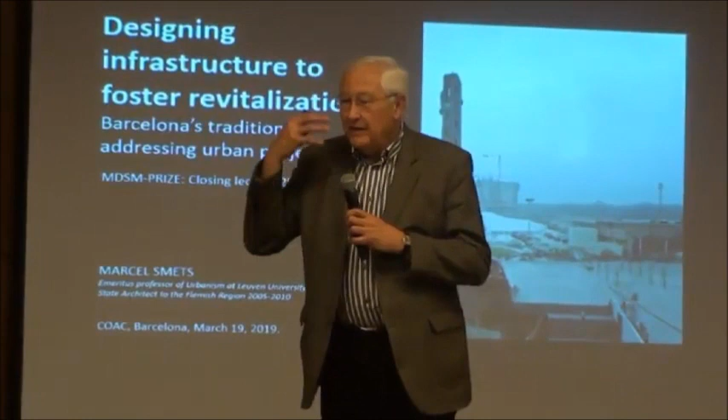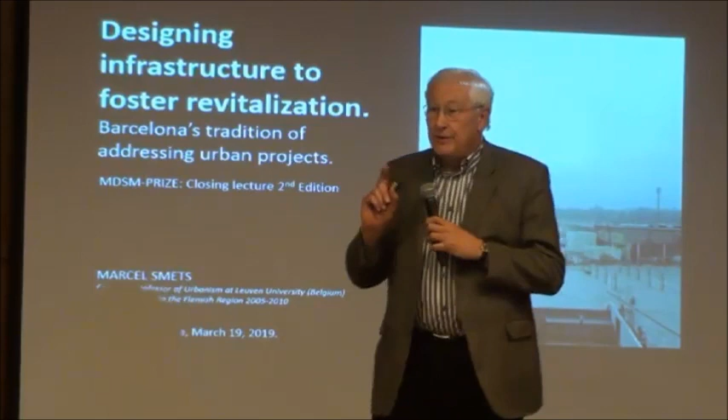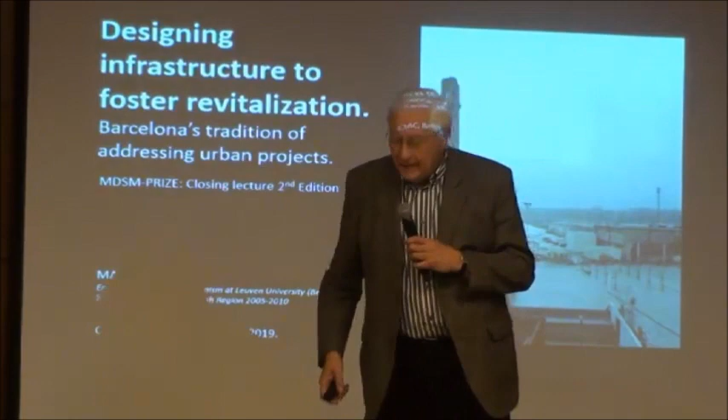Thank you very much, Joan. This is a place where I understand Catalan, especially when you talk about me. And I would like to add that maybe, and it's one of the nice things that you remember, that you highlight in this introduction, and I would like to return the ball, you know. I think we belong to a generation that has never considered urbanism just as design, but also as an intellectual trajectory of history, and also, as you did with the Olympics, influencing the decision-making, trying to do well for society. I think this is a very important element of what I'm going to talk about later, but it's a very generational thing also. So thank you very much for highlighting that. Thank you very much for being here.

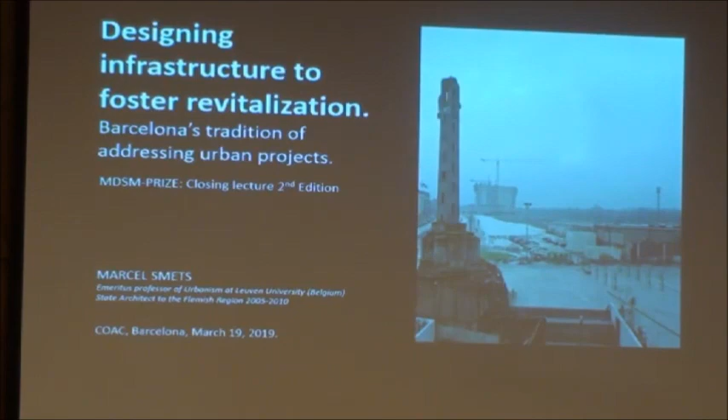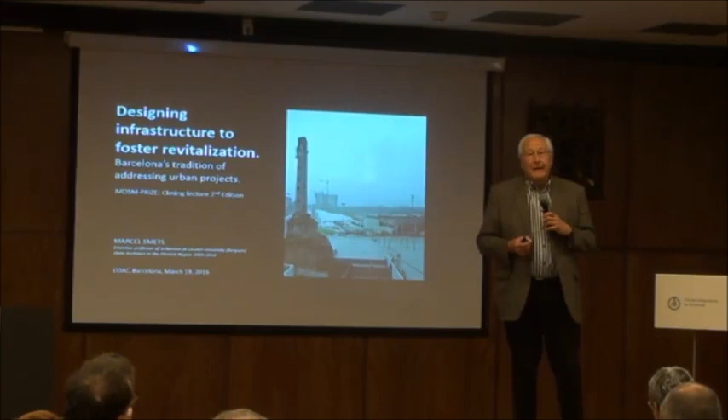I feel very honored to speak in this room or in this building, because as Joan has pointed out, Barcelona has always been extremely on my mind, as the song says, and I have many friends and masters here to whom I pay tribute, because many of my thoughts are also part of them.

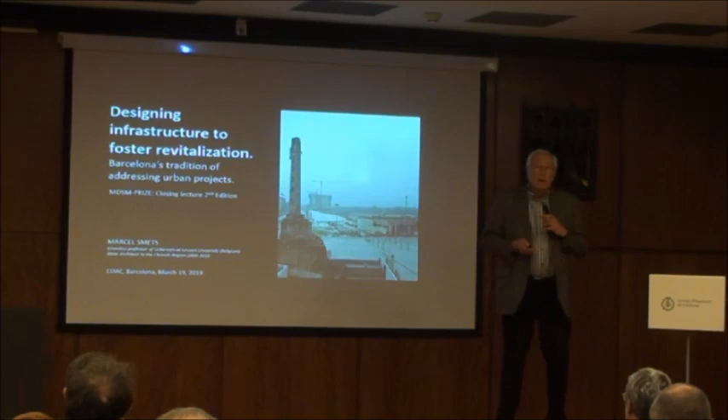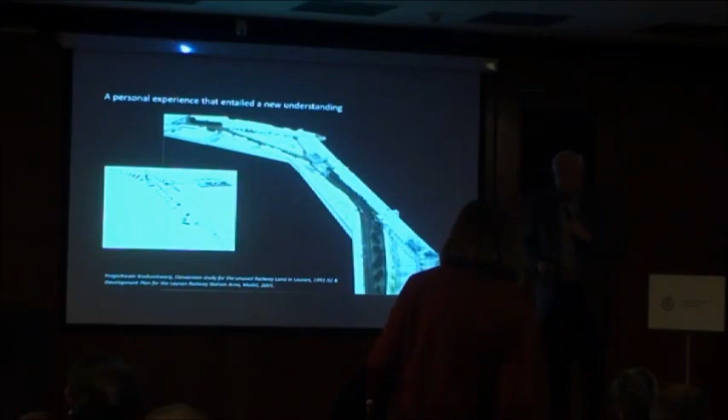So I started this picture, and also the poster that you saw, with this picture of the Leuven project in the beginning, in the early phases. The phases of what Ignasi de Solà-Morales would call the terrain vague, the moment when nothing yet is settled and everything is only hope. For me this is also important, because this is maybe the moment that is, for a project, one of the most interesting.

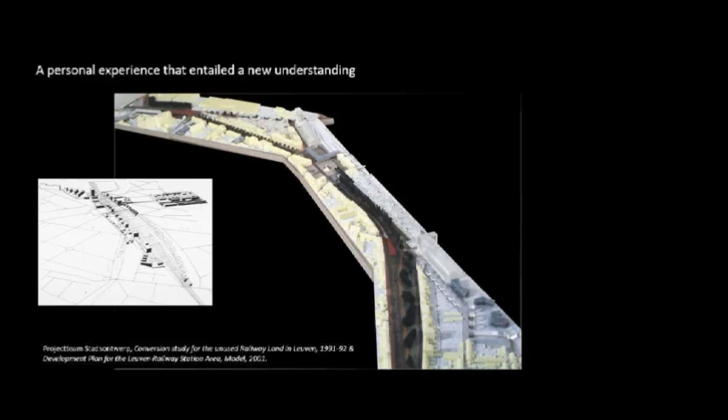Many of you know that I had the honor of being entrusted, when I was teaching at the University of Leuven, by the city, with the reconversion plan of a large area involving the station, but much more than the station. This plan involved a study in the first phase, and then a more detailed commission later. The reason I bring it up is because I'd like to start my argument by explaining where it comes from. It comes basically from a personal experience, one I had also with Joan, when I remember we talked about this project in a very early phase when you came to teach at our university, and later with Manuel.

What I want to illustrate is very practical. The thing was on a large scale and a medium scale, and then on a very detailed scale, involving the passage under the tracks, and also the place where the bus station was going to find a sort of new hall to the city, a new entry.

But at the same time, we never really solved certain issues. Actually, as you see, this idea of the square in front of the station is too divided. And there are other things that I could mention.

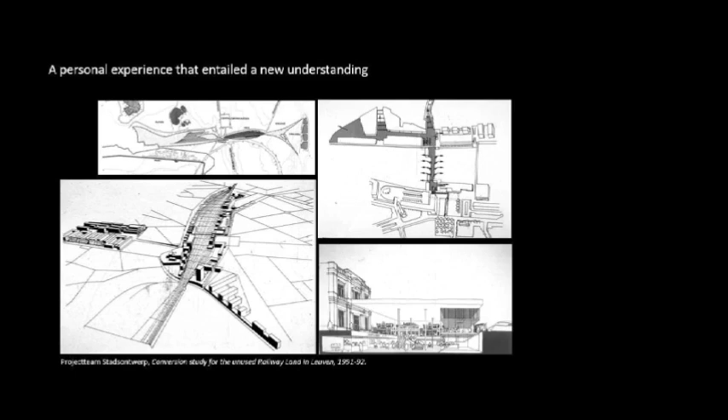So when the new mayor came to office and we were managing the whole operation, I had, I think, one of the best ideas I've ever had in my life: to involve Manuel in this adventure. I had known Manuel from the Antwerp studies, where I was his outside critic. And actually, what happened was that Manuel was able to solve a number of issues that, in effect, we had never addressed.

I think this is where you recognize a certain mastership, when you know a project by heart and you find that there is an invention which is done which you hadn't thought about.

And the invention had to do with how you link the city while having to pass the major throughway, and how you make a parking accessible from all sides, both entry and exit, and make it a connection in rainy weather between the passage under the rails and the city. This simple idea, though it looks simple, of making the tunnel go to minus two, which allows the parking to be sort of a bridge above it, was really like what they say, the egg of Columbus.

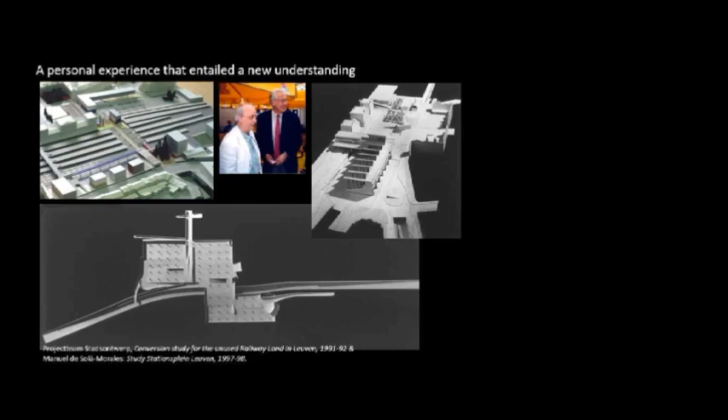I would like to start this lecture by illustrating just a few points out of this project of Leuven, a few points that I think merit commemorating because I recognized afterwards they are part of a larger story.

One element is that, which Manuel taught me, there is a layered situation, and you can exploit programmatic complexity in order to create a number of fascinating layers.

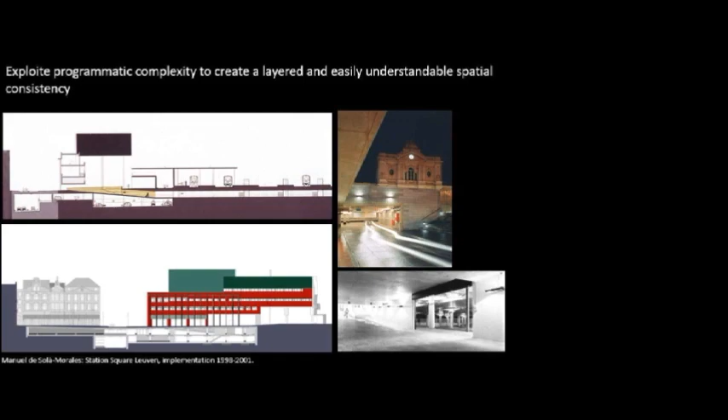For instance, the passage, and it's very often the section that becomes important. The entry into the city, which is at the same time part of the parking, the tunnel, which becomes part of the parking with the entry and exit, the bus station related to this entry, the fact that the bus station at the same time rests on the parking, and by doing that you need a certain grid, etc. All of these elements of the underneath and the upside, all being thought together in a sort of layered way.

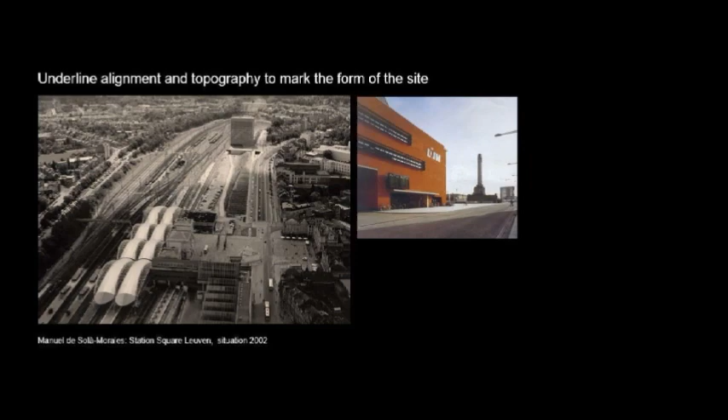The other point is the fact that the alignment and the topography really form the site. The idea of linearity, which made, for instance, the direction of the bus building, which we had initially planned, turn so that the direction of the site would be more unilateral.

Also the fact of creating a new building typology that accentuates the character of the site. Of course, when you make a building that closes a square that never existed before as such, and divides the public square into the buses here and the public square there, you have an angle.

I don't have to tell you how angles were important for Manuel de Solà-Morales, but this angle is also pronounced by this larger roof, while the opening in the building portrays the idea of the train that enters into the square.

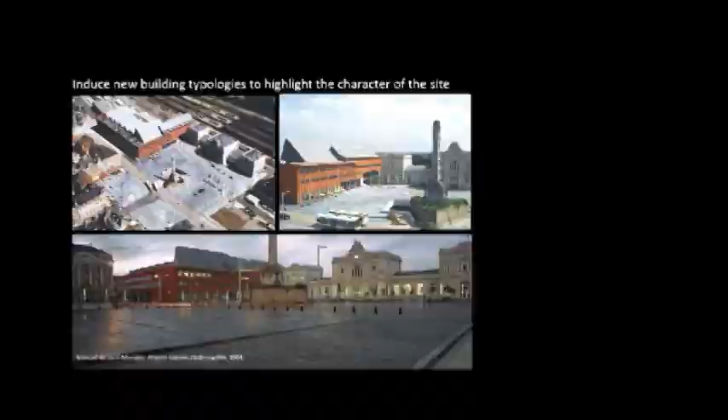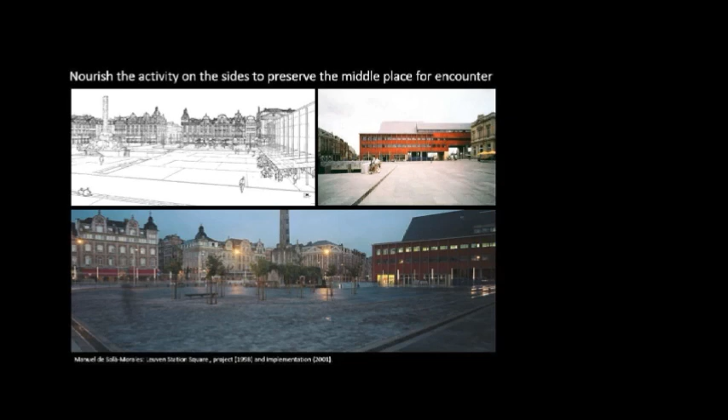The idea that the center should be empty in order to, by making uses and creating activities all around it, and by continuing the idea of the terraces, keep something of the terrain vague idea in the middle.

And then, of course, the idea that a tunnel or a road is not just a tunnel. It is an architectural item. It is a promenade. It becomes something through which you move, whereby the movement each time is a pleasure, and it creates, of course, a sort of landscape of its own.

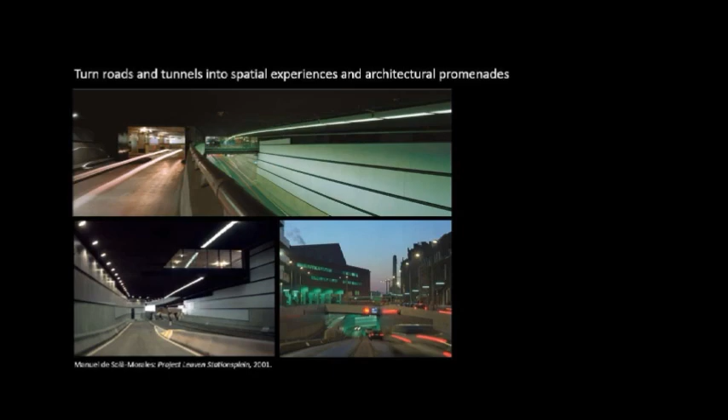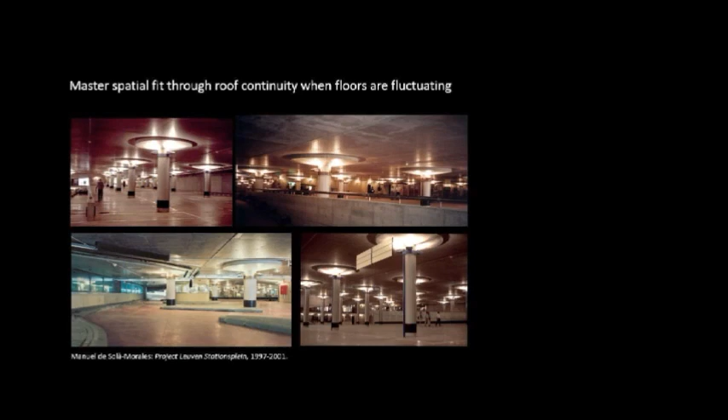The fact that a parking, which by definition in this case has different levels, the ground floor moves, so it becomes an artificial topography. But this topography, how do you create unity? The unity, of course, is with the roof, and the roof that is just underlined by these kind of champignon pillars is what creates all the unity.

The bus station, on the other hand, where you have the movement in itself going up and down, etc., you need, in order to master that movement, a sort of permanence, a sort of dignity and a timely permanence, whereby, when there are no buses, you can still confront the elements. And there is a dike, so that you can look upon the spectacle of the movement.

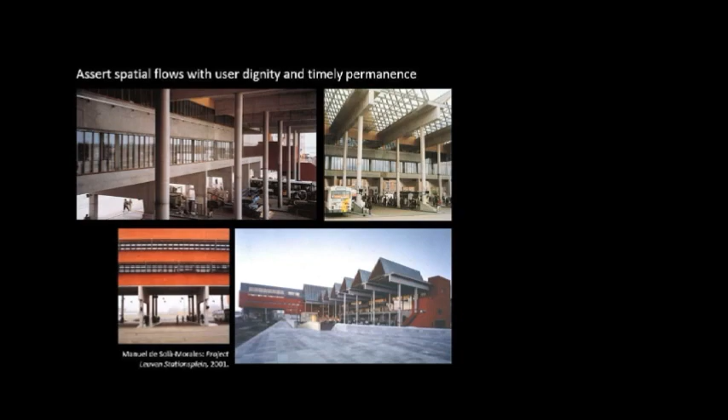And then, very important in my opinion, the fact that you have to consider the urban project at what Johan called the intermediate scale, a scale that is of a size enough that you can still master it, and that in itself is a sort of self-sustaining piece that transforms afterwards the neighborhood.

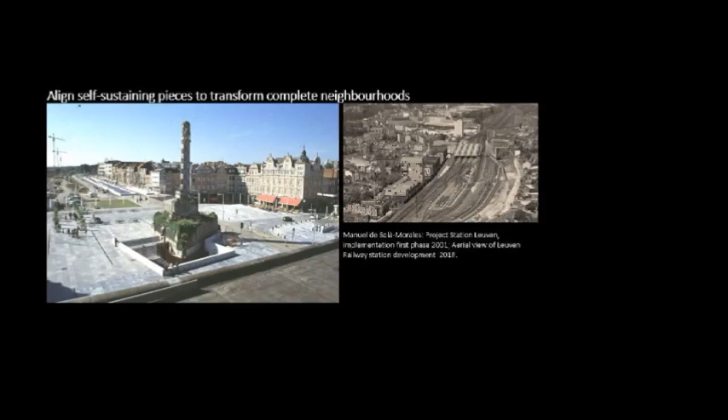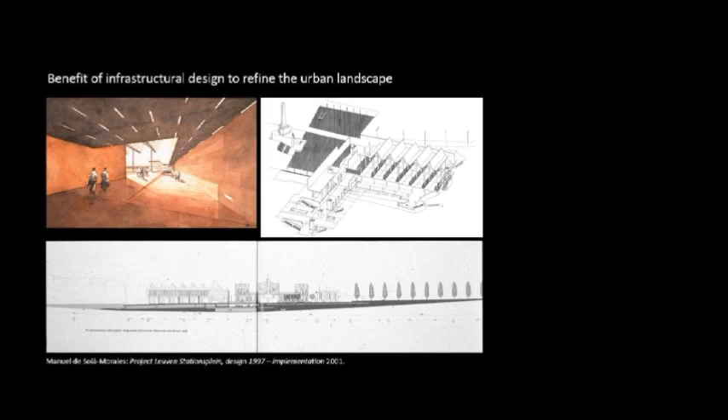In this case, it's nice to see how this self-sustaining piece, when delivered in 2001, leads to a development that is now more or less completed 16, 17 years later. And above all, the fact that infrastructural design is something whereby you can refine the urban landscape.

So I wanted to very quickly give this overview in order to try and explain a sort of personal motivation. A personal motivation of two, in my mind, very important things. One, the acute awareness of the prominence of infrastructure today, both in public investment and in city making.

When we think about allocating finances, etc., we see that infrastructure is basically that which always still can get money. So we have to use it in order to make a city today, and this is something I became extremely aware of with the Leuven project and with working with Manuel.

And the second was what I tried to say when I talked about the egg of Columbus and the parking which he designed: a sort of fascination for design intelligence expressed in projects that seem to succeed in solving problems of an utmost complexity by doing very simple things that resolve everything.

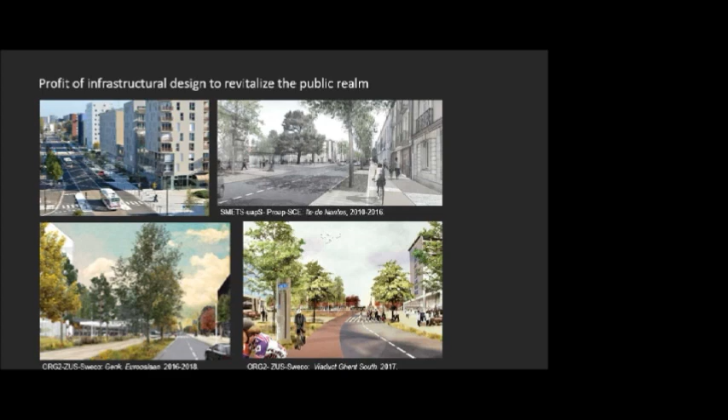So I tried to pursue that afterwards in my own career. It's not the place to go into that, but just for the record, I'm involved in many infrastructural projects at the moment still, but also in terms of research.

The last book that I published together with Kelly Shannon was exactly about this idea of getting to know how contemporary infrastructure forms our landscape today. What we tried to do in that book is identify the design attitudes which prevail today in the design of infrastructure, and choose representative projects throughout the world that identify these kinds of attitudes.

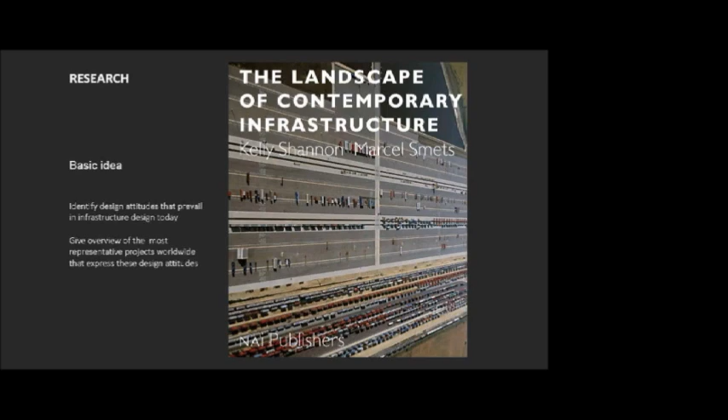There are in the book four contemporary paradigms with relation to designing infrastructure. The first is to hide the intervention, to avoid conflict and leave the existing environment untouched. We will come back to it at the end of the lecture. The second is to exploit the constructive rationality as a source of beautifying the object and detach the infrastructure from its setting, the infrastructure as the beautiful object.

Let's take the fourth: the effects of mobility are structuring the landscape today. Mobility creates accessibility, accessibility creates market value, and we have the tall skyscrapers in the most accessible points. But the third element, which I want to come back to, is to consider the making of infrastructure as an opportunity to review the existing environment and to integrate its design in an encompassing transformation project of the urban realm.

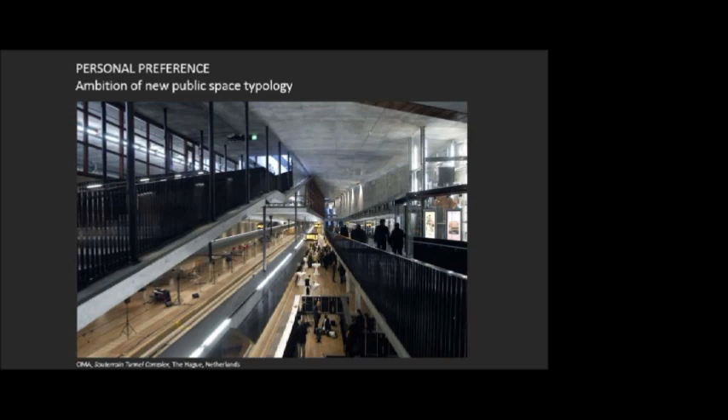In this project made by OMA in The Hague, this is just a tram station. It's the station under one of the main shopping streets. And actually the station, as you probably know, is also a parking space, is also an exhibition room, and so forth. It's a very complex, simple project that changes many things at the same time.

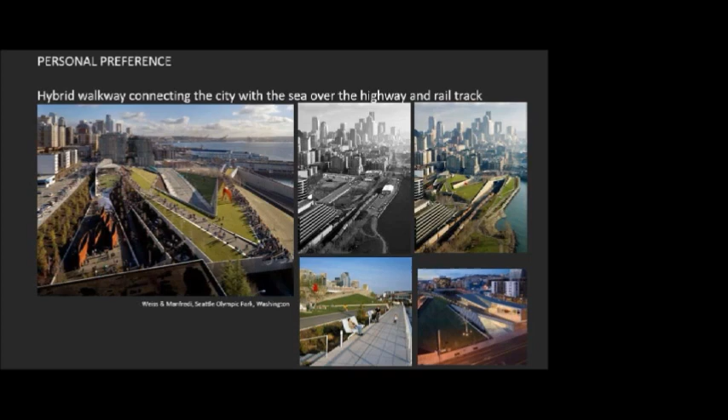And there the road, etc. So the existing infrastructure is left untouched, and at the same time you have this fantastic idea of linking the one with the other and seeing the sea all the time.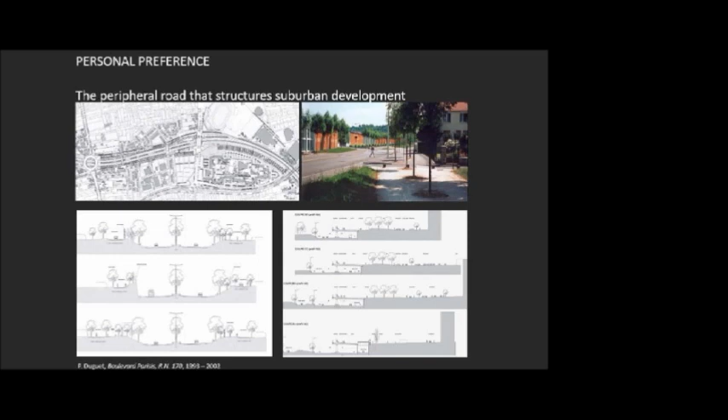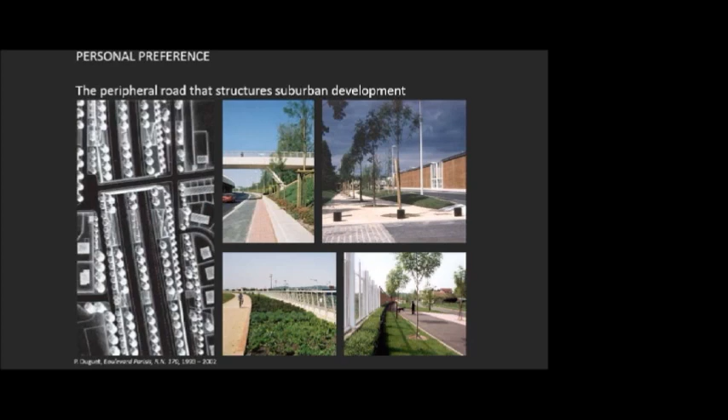And instead of being a barrier, it becomes something to complete and to give a sort of sense of belonging, in a way, a central point to this peripheral development around it.

When I looked at these examples, and I looked at this third category, and I remembered what I learned from Manuel, I started to look a little bit closer. I'm wondering, and this is a sort of assertion that I would like to make tonight, whether this model of fusion is not something that you as a community have invented—whether we cannot speak about a Barcelona model.

All of these examples are characterized by a number of very few but essential things. They all deal with the creation of a new, inclusive type of infrastructure that responds to the characteristics of its particular setting, of its particular environment. It is not imposing, but it is working with the environment by creating a new, inclusive typology.

It's establishing a rather traditional type of pedestrian-oriented, urban-like space. It's not the fascination with cars that go about—no, it's the fascination of the pedestrian and of the citizen, of the urbanite. It's not denying the existence of movement, but it's recognizing its role as a constituent part of contemporary urban life, and it's domesticating the movement by making the project.

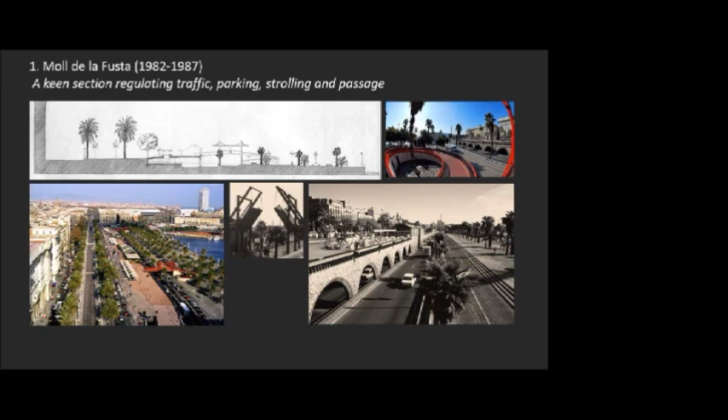So it is actually a completely new situation, based on the transversal section, which was so keen, as I just said, to create something that is an extension of the town, by organizing local movement. And then the through way is sort of hidden, and at the same time not, because it's passing in one direction, but at the same time it's creating a roof and a parking, and on the roof you have the dike, and you get this fantastic kind of public space, which at the time was a double-layered public space, one on top, one here, when the restaurants were there and when it was the place to be seen. I understand that not everything works out as it is planned, but that's another discussion.

The second example, by Roig i Batlle, the node of Trinitat, is also in a way very clear, because it is an existing motorway, but by what is being done, it is not just like many landscape architects try to do, something to beautify an existing road. It is giving, in my opinion, a new significance to this idea of the road by notably joining two elements, the junction, whereby you have the passage from one part, from Trinitat to the other part of the city, under the motorways and so forth.

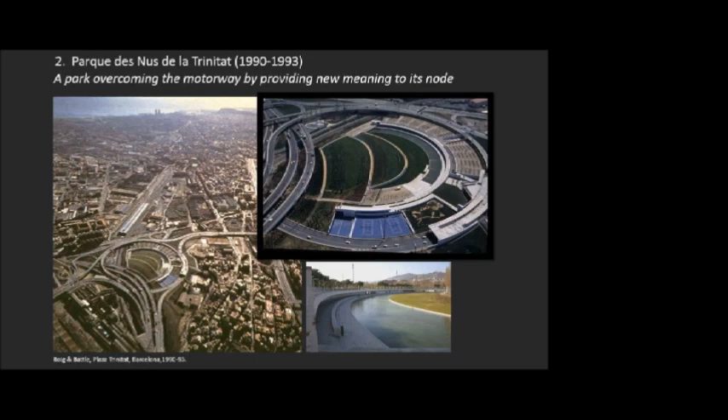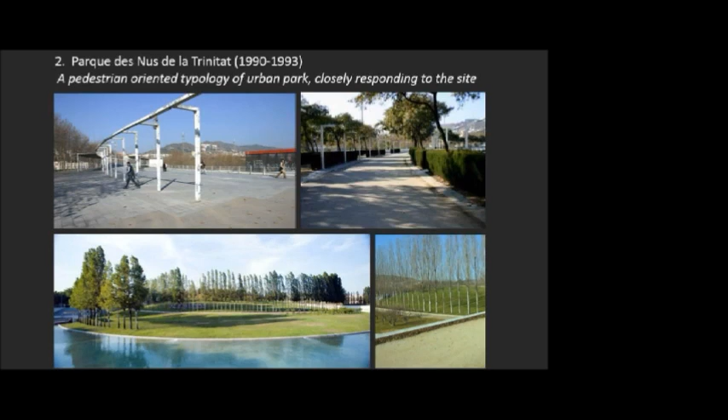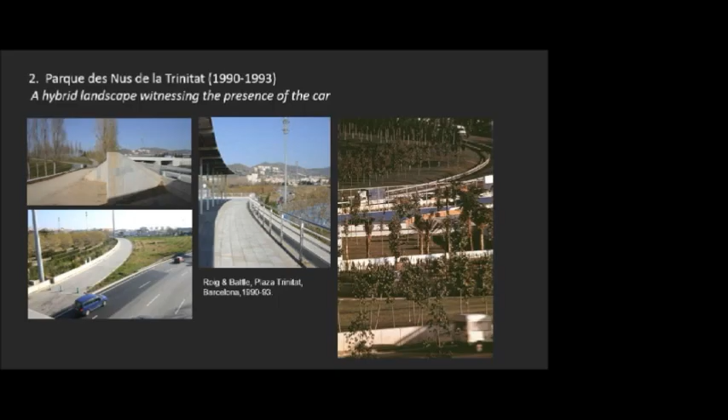This idea of creating a junction at the local level, of creating actually an urban park in a sort of extension of the existing streets and the existing dwellings, and yet as you go further into the node, create something that is a park of its own, and has manifestly a form that is determined not only by the node, but also by the site and by the differentiation in topography and levels that you have in it. And thirdly, but importantly, it is not denying the existence of traffic. It's creating a sort of hybrid landscape in which the traffic also plays a role and becomes a part.

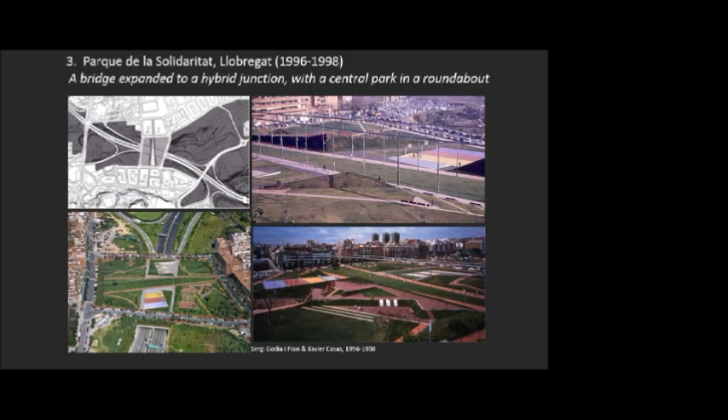We could say the same thing for a more moderate, but also very much published, example: the Parc de la Solidaritat in Llobregat by Godia and Casas. It's in a way a covering of the Ronda de Dalt, the motorway, and it's a junction because of that of two quarters, two districts. Yet what is interesting about it is that it's also creating a new typology, because actually it's a sort of roundabout again, but the roundabout is inside, becomes a park. So you get a situation whereby the car traffic is still possible, but it becomes an important element that is joining the two elements together, whereas it is relatively moderate in its distance, so the motorway can still pass.

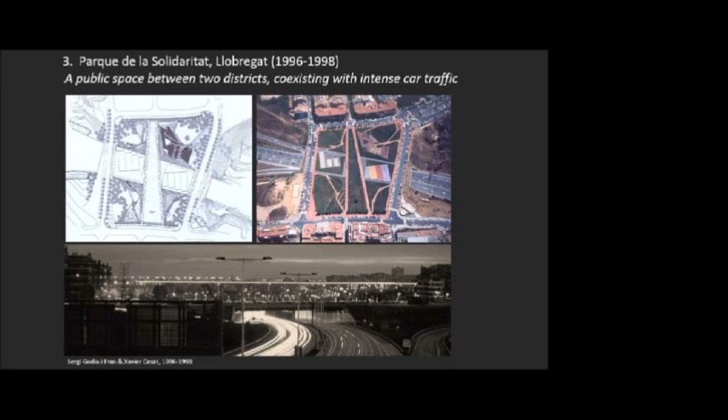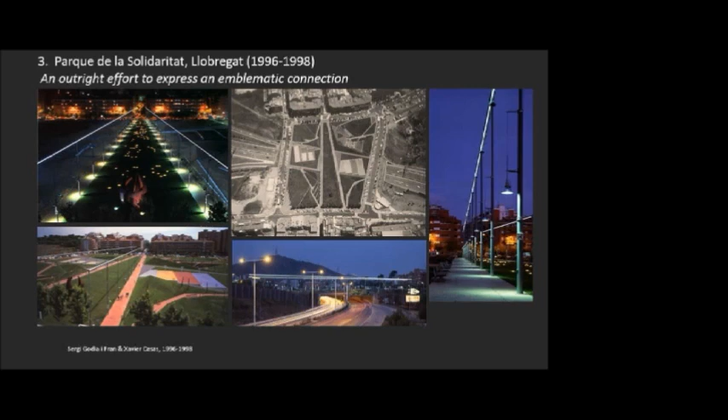And this idea of linkage while coexisting with the traffic is extremely well, and I would say rather iconically expressed, notably by this passage, but also by the railing, by the lighting, and so forth. This idea of something that becomes exceptional, and because of that, gets its value.

And the last example I would try to point at is the Gran Via, by Andreu Arriola and Carmen Fiol.

There also, I think, when you see what happened with the Gran Via and how it was transformed, it's a really interesting example of the domestication of car passage, domestication of movement in terms of gaining space for neighborhood, making encounters, making this kind of a park.

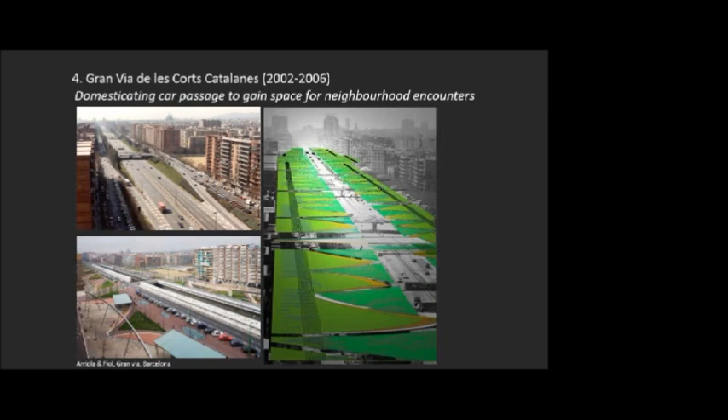I think this drawing that they made is very illustrative of the purpose. Only the gray element is still really traffic, whereas all the rest of this enormously invading section is becoming something else. It's not just a park, it's a hybrid of something that has never existed before.

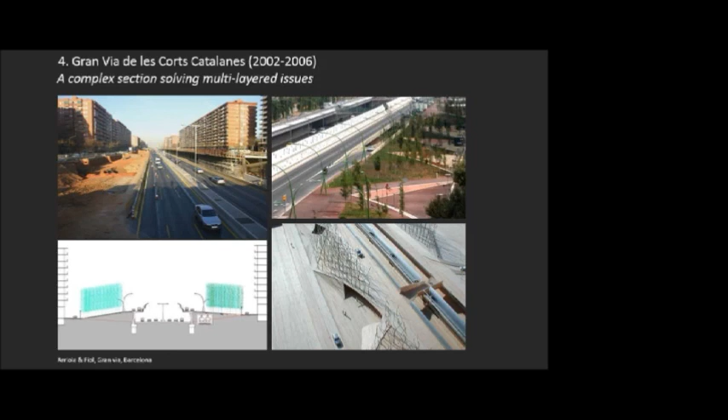Because of the section again, it is with these cantilevers and with the noise barriers that are made there, and the tramway that is accessible from this side, from the local roads, etc. You get into this marvelous situation of this hybrid landscape that becomes a surprisingly public space and is rather unique in its genre.

All of these examples, I hope they're all in Barcelona, obviously. They are all by different architects. And in my opinion, they transfigure an attitude, a way of dealing with infrastructure, a way of considering it, which I think is extremely valuable, or has been extremely valuable in a part of our time.

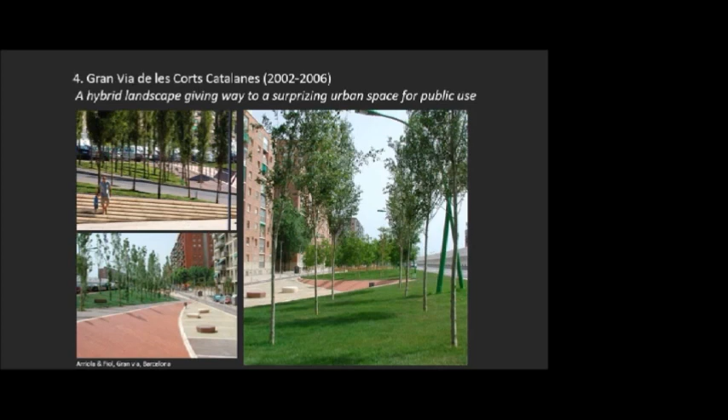I want to go relatively quick here because we could keep on enumerating examples. It is clear that this attitude is not just the four iconic examples that I mentioned. They have had their influence, exerted an influence over a real period of time, as well in the projects that have been done in Barcelona itself, as well as in the projects done by Barcelonese architects abroad.

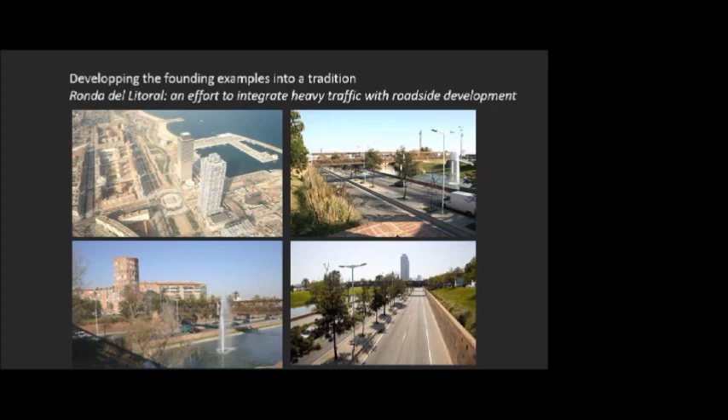So in Barcelona, for instance, I think it's clear that the Ronda del Litoral works also with this section, whereby the consideration is how can we make a road that becomes part of a whole environment in a way. It's not only about crossing the road, it's the road itself that becomes part of a new landscape.

And I think that goes also for the Ronda de Dalt, in the sense that the design condition is very different because the topography is different. We're not flat, we're in a mountainous situation, so we are basically in something that is dug into the land.

This digging into the land is resolved in such a way that it becomes an accumulation of scenic views, going on with the infrastructure in such a way that it highlights not only the traffic and the movement, but, as it's very clear in this kind of pictures, emphasizes the environment, creates a spot to lose your breath in a way.

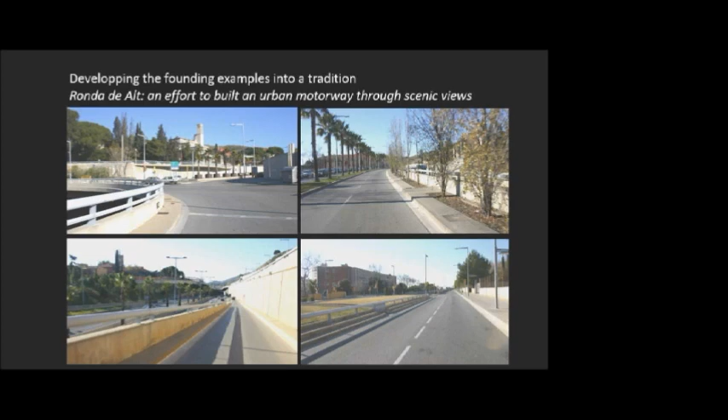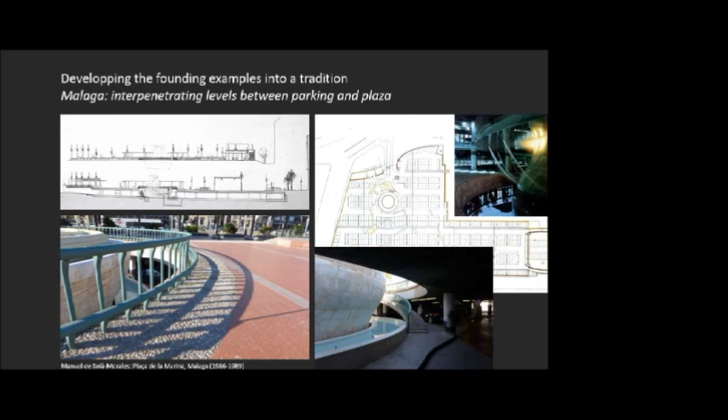Okay, just to cite a few more examples. When you look at Manuel's project in Malaga, for instance, it's also about the section, but it's also about how do we configure a parking that is at the same time a public space, and how this gives new kinds of landscapes.

I would also really want to mention here Joan's project of the Grotiusplaats in The Hague, which in my view is also exceptional because it is basically making two buildings which are bridging the A12, I think, anyway the Utrechtsbaan, the motorway. But at the same time, these bridges are open. Why are they open? Because you have to be able to have local traffic there.

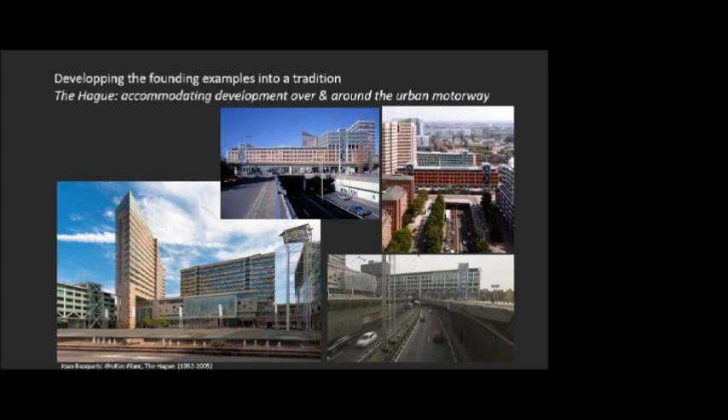The local traffic identifies the court of justice, which is there, but since we don't have enough space to make the whole thing, because the space here is limited, we sort of cantilever it, and we create an illusion that the road is no longer there, and that this becomes a real place of a new nature. Again, a sort of hybrid landscape which actually we didn't know before.

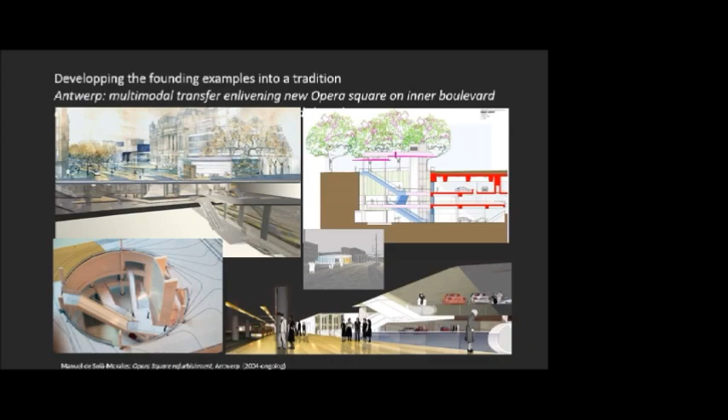And maybe also Manuel's last project in Antwerp, where the creation of a pavement of 40 meters before the Opera House, by concentrating all access to the new tram station planned there, which also connects to a parking and so forth, creates at the same time something above that is a new sort of space or place to be.

What I try to illustrate, in my opinion, is that there is a tradition of working with infrastructure which is particular, has evolved through a number of examples in this city, and has also been very influential in other projects. I would like to end my talk with asking questions, because in my opinion we are now faced with another situation more and more.

I think the prevailing design conception gets to be much more divide than integrate, and what I called the Barcelona model is becoming questioned. Its worldwide influence at a certain moment is slowly disappearing. In my opinion there are a number of reasons for that, which of course go beyond architecture or urbanism.

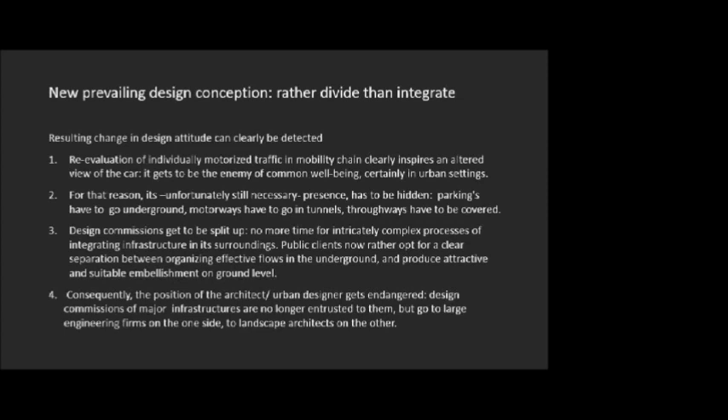Of course this kind of new attitude has been there for some time, but I think it's getting different. There are precedents of covering, of tunneling, which I also noted in our book, for instance. This is a very famous case of a 6-kilometer tunnel for the high-speed train under the so-called Green Heart of Holland—very costly because of the water and the dikes, but it was done in order to preserve a planning idea. This decision goes back now 15 years.

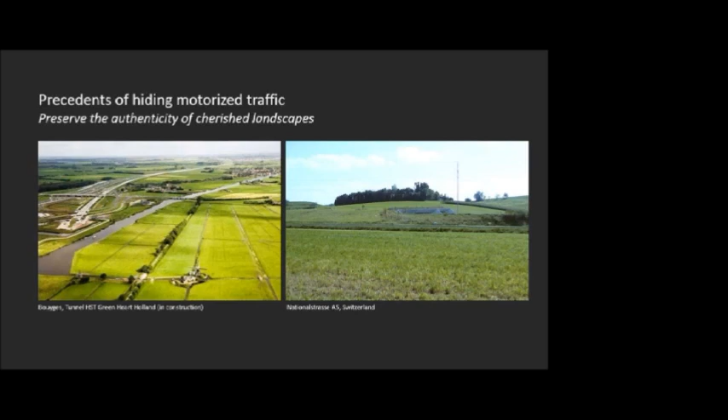This motorway in Switzerland has been developed like this in order to preserve the existing landscape. In situations of countries with a lot of money, it existed before—like this famous example of the A1 in Paris, in order to heal disruptive effects exerted by major throughways, mostly made in the 60s.

But you see, of course, the difference between this and the Gran Via. Here it's just, okay, we will just cover it. In the Gran Via, it is a coexistence between the two. Here, it is the engineers that made the underground, and it is Michel Courajoud, the landscape architect, who designed what was on top.

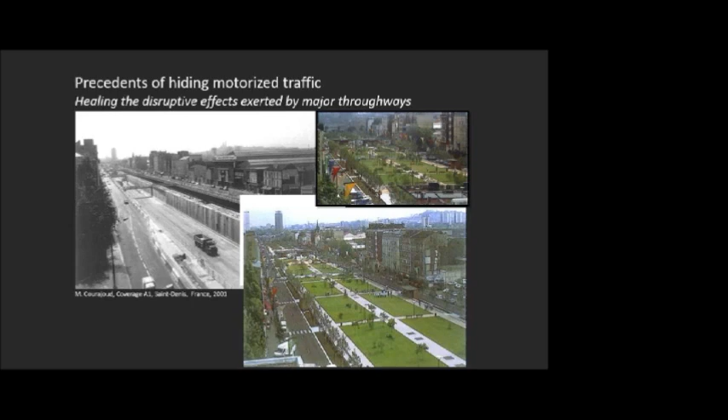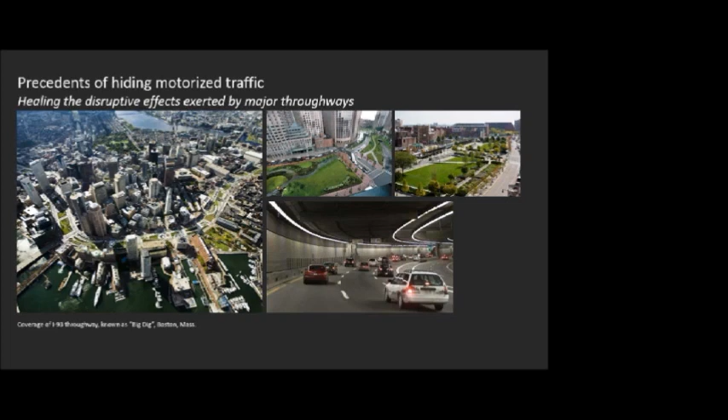The Big Dig in Boston, relatively well known, a very long elevated motorway, which was finally, after years and years, put into a tunnel, a very vast tunnel. Years later, without having an existing contract at the beginning, some landscape architects were charged to do the above ground work. I should add one of the most famous examples, which you have in your own country, the Madrid Río project in Madrid.

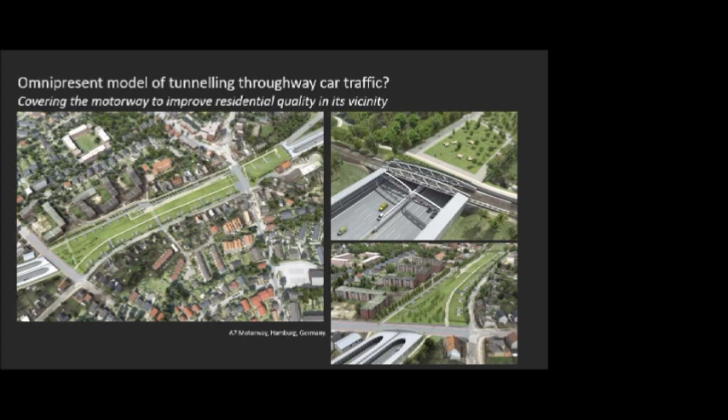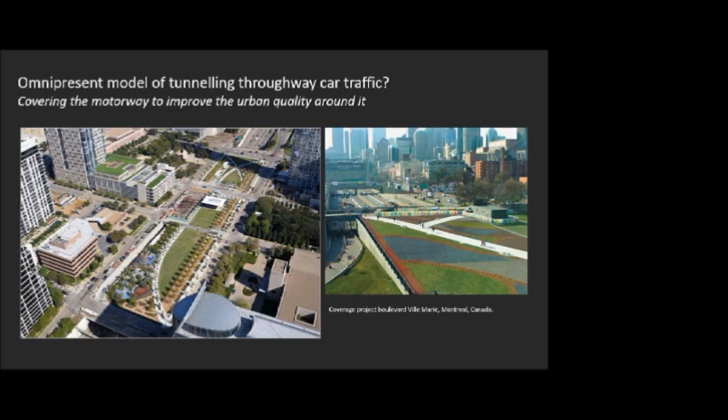The second example, rather well known, is the Ville-Marie in Montreal, which was an important competition between landscape architects, nota bene, not architects, in order to cover an important part of the boulevard passing through the central part of town, whereby this environment would benefit from the coverage and from making this kind of new landscaped environment.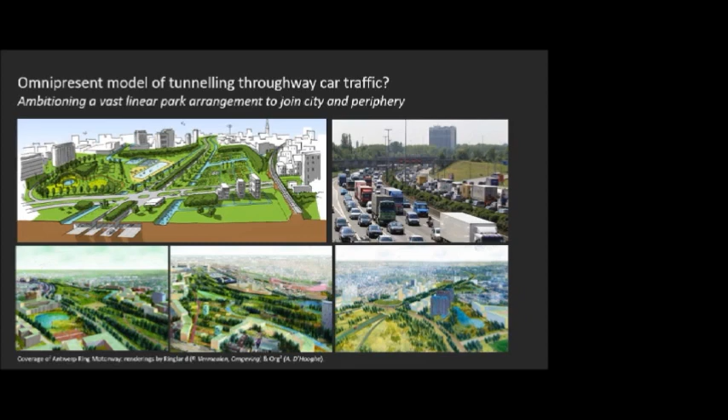Now, all of these examples recur, and do away with a certain attitude which I think was rather valuable. I would like to end by pointing at the fact that the most clear example of this change is probably in your own city, where you had this very modernist attitude by Arriola and Fiol, the Plaça de les Glòries, which was this kind of elevated roundabout with the major intention of creating an urban space in the middle, accessible through porticos from all sides, but also, by making the roundabout, creating this kind of unique image of iconic buildings along its course.

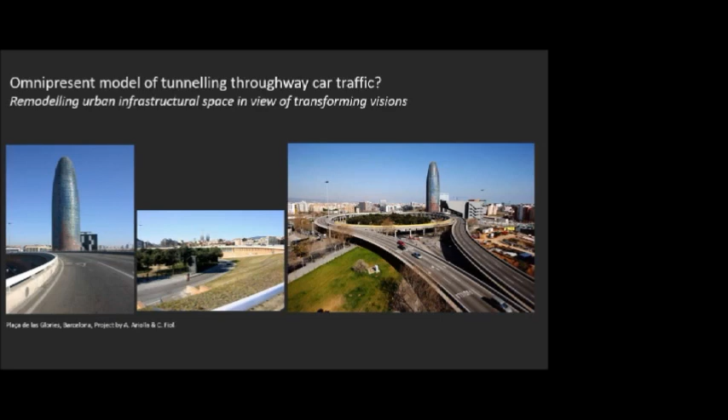When I see this, and see that now it is to be replaced by another kind of approach, I don't know the exact status or how decided it is. I only saw that it was published by the municipality as a new vision. And in this vision, I discover also the idea of separating and realizing something on top that is rather unrelated to what is happening underneath. Seeing these attitudes evolve throughout the world, for reasons I've tried to explain, at least in my opinion, we are also losing something which was invented in this town. Thank you very much.

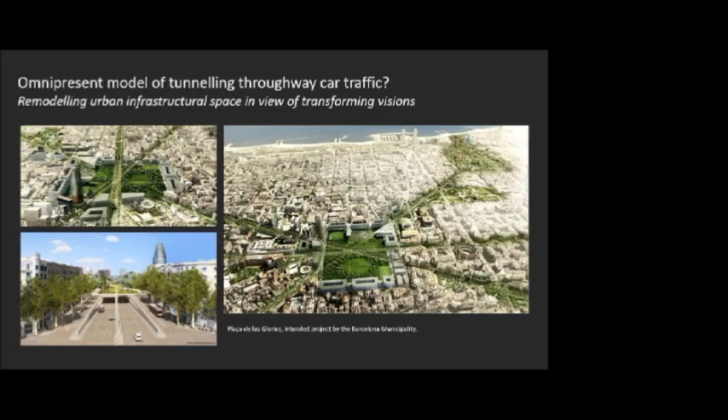Thank you very much for your very enlightening, complex lecture. I would just like to thank you for your very inspiring and very rich lecture and for explaining the wealth of the Barcelona model of urbanism.

What I don't fully get in your argumentation is your precise reasoning why you think that sort of urban dichotomy between the park and the traffic infrastructure is something you consider poor. Of course, it's less complex, it sort of seals the motorway, the car, away. I can somehow see your argument, but maybe I wasn't listening attentively enough to really get your reasoning why you think this is a loss of integrating the car into the visual and sensitive aspect of the city. Maybe I've expressed it poorly, I'm sorry, thank you very much for your observation.

I didn't want to express it as a loss in itself, because I think we are always children of our times, and it's logical that we get different solutions than 20 years ago. So I don't think we have to evaluate in terms of loss or gain. What I meant when I spoke about loss was the loss of a certain model, a certain way of thinking, which was very particular, very rich, very architectural and modern, dealing with the complexity of the city in a hybrid way, integrating the elements that were part of the problem, or trying to.

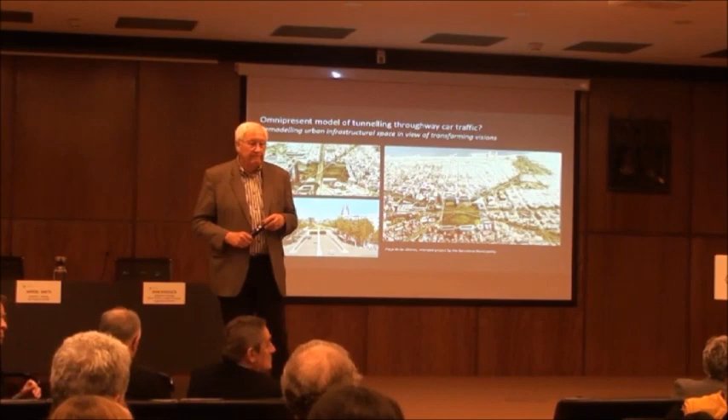Okay, I don't want to make it longer than it needs to be - it was just a thought opener, so maybe we can reflect later about it. We don't always have to reflect on it in the moment itself. Thank you very much again for asking me.